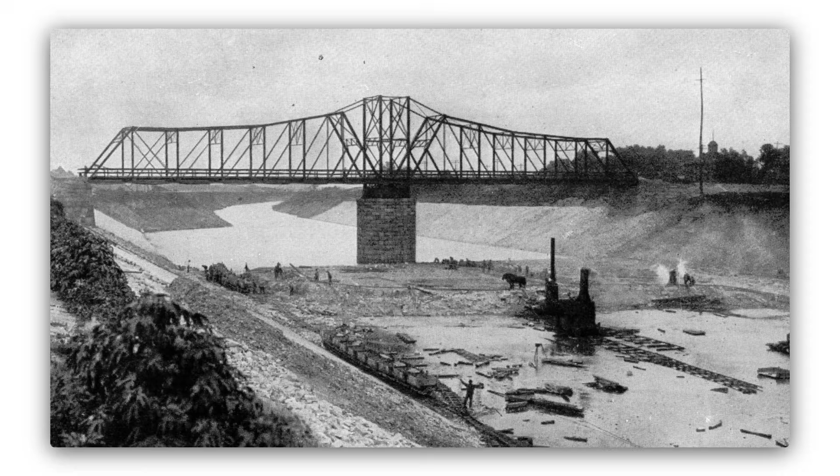American engineers between 1892 and 1900 completed an engineering project that no modern team has ever replicated. They reversed the flow of the Chicago River. The project cut 28 miles through Niagaran limestone bedrock and moved 43 million cubic yards of earth and rock by hand. 8,500 workers built it under Chief Engineer Isham Randolph.

On January 2, 1900, the canal opened. The river reversed direction. The typhoid death rate in Chicago dropped from 174 per 100,000 to 14 per 100,000 within a decade. The river is still flowing backwards today.

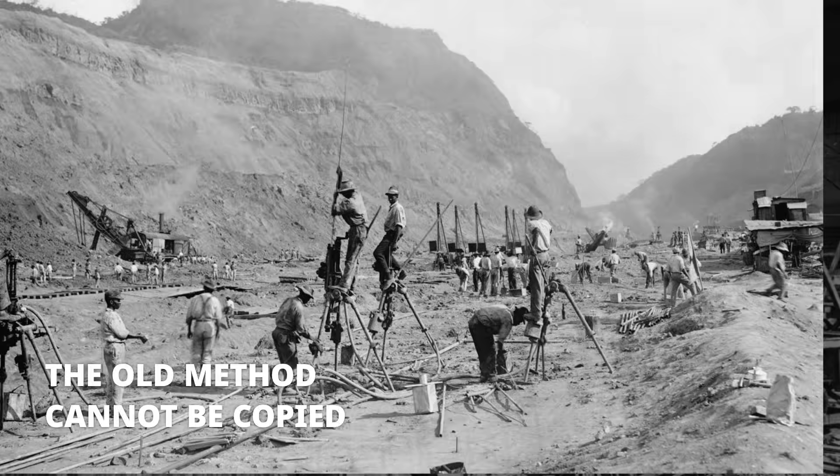The Chicago River reversal is the most extraordinary engineering achievement of the late 19th century in the United States. The project does not have the public fame of the Panama Canal or the Brooklyn Bridge or the Hoover Dam. Few Americans today know that Chicago reversed the flow of its river. Fewer still know how the reversal was accomplished or why it was necessary.

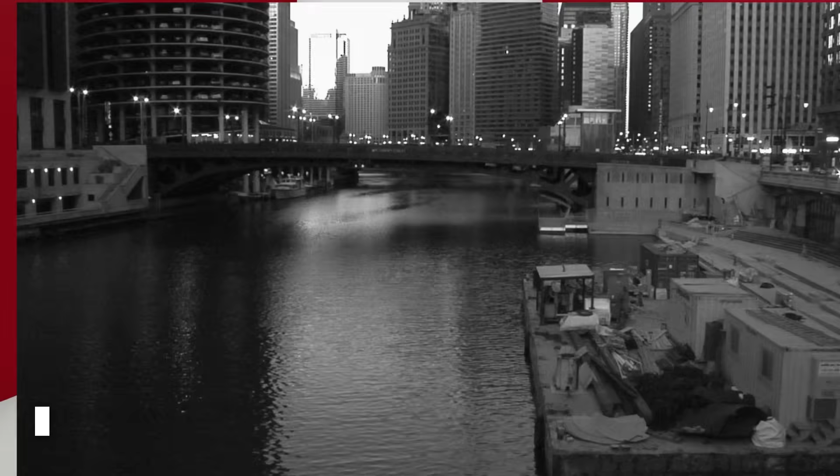The reversal was the engineering precondition for Chicago's emergence as a major American city. Without the reversal, Chicago would have been killed by its own sewage. The river reversal solved the sewage problem by reversing the direction of water flow so that Chicago's wastewater no longer contaminated Lake Michigan, which was the city's drinking water source. The reversal worked. The river has been flowing the wrong direction for 125 years. The problem that necessitated the reversal was sanitation.

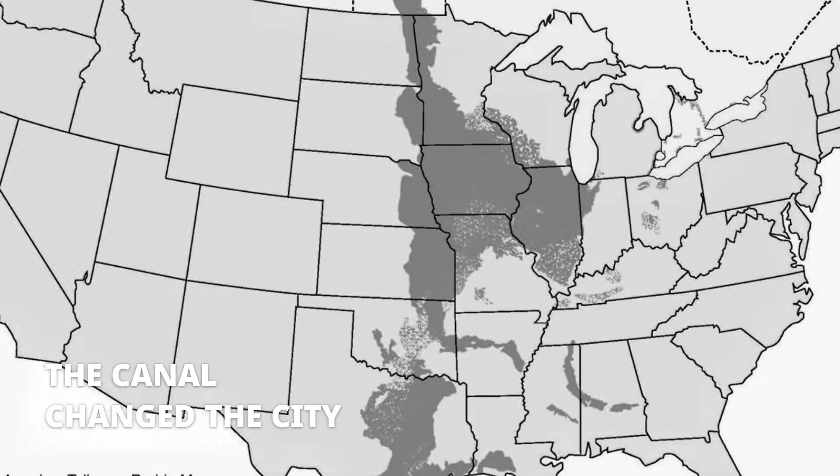Chicago in the 1880s was a rapidly growing industrial city with a population approaching 1 million people. The city sat on the southwest shore of Lake Michigan at the mouth of the Chicago River. The Chicago River flowed naturally from west to east, draining the surrounding flat prairie land into Lake Michigan. Chicago's wastewater entered the Chicago River through the city's expanding sewer system, then flowed into Lake Michigan, which was Chicago's drinking water source. The wastewater contaminated the drinking water.

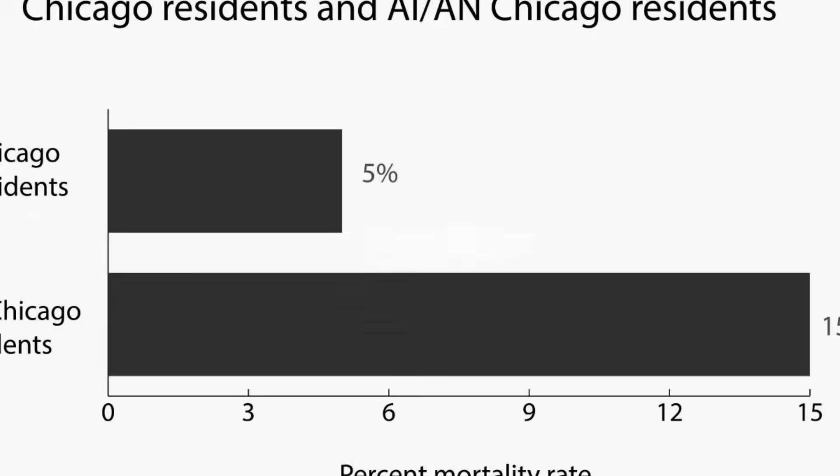Typhoid fever and cholera became endemic in Chicago by the 1880s. The death rate from typhoid fever in Chicago in 1891 reached 174 per 100,000 population, the highest typhoid death rate of any major American city. Chicago was dying of its own sewage.

The engineering solution proposed by sanitary engineer Lyman E. Cooley in the 1880s was to reverse the flow of the Chicago River. If the river could be made to flow westward instead of eastward, the city's wastewater would flow away from Lake Michigan rather than into it. The wastewater would discharge into the Mississippi River drainage system through the Illinois River, eventually reaching the Gulf of Mexico 900 miles downstream. Lake Michigan would be protected from contamination.

Chicago could draw clean drinking water from the lake. The typhoid and cholera death rates would drop. The city could continue to grow.

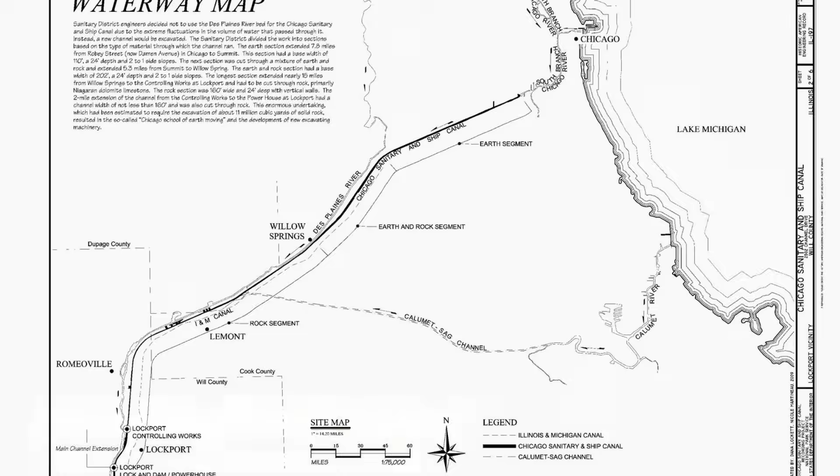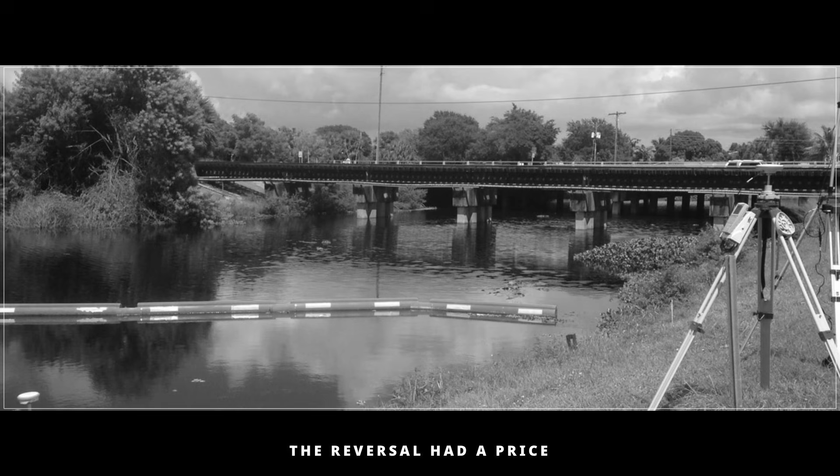Now we walk through what reversing a river actually required at the engineering level. The Chicago River has its watershed almost entirely on the Lake Michigan side of the Chicago Divide, a low ridge of land approximately 3 to 5 miles inland from the lakeshore. To reverse the river, engineers needed to cut through that low ridge with a channel deep enough that water from Lake Michigan would flow naturally westward through the channel into the Illinois River drainage system.

The required channel would be approximately 28 miles long, running from the south branch of the Chicago River near downtown Chicago southwest to the Des Plaines River at Lockport, Illinois. The channel had to be deep enough that the water surface at the Chicago end was lower than the Lake Michigan water level, which would cause water to flow continuously from the lake through the river system and into the channel. The required depth was approximately 36 feet below the original ground surface in the deepest sections: 28 miles, 36 feet deep, through Niagaran limestone bedrock, by hand and explosive.

That was the engineering challenge the Chicago Sanitary District faced in 1892 when construction began. The Chicago Sanitary District was created by the Illinois State Legislature in 1889 specifically to design and build the canal. The district had taxing authority over the city of Chicago and the surrounding suburbs, allowing it to issue bonds and collect property taxes to fund construction.

The total construction budget approved by the district in 1890 was approximately $30 million in 1890 dollars, equivalent to roughly $950 million today. Construction began on September 3, 1892, with Chief Engineer Isham Randolph in charge after the original Chief Engineer Lyman Cooley resigned in 1893 over disagreements with the district board.

The political battles that preceded the canal construction were intense and lasted for nearly 2 decades before construction began.

The basic engineering proposal had been developed by sanitary engineer Lyman E. Cooley in the late 1870s, with detailed cost estimates and route surveys completed by 1881. The proposal required the state of Illinois to authorize a special taxing district with bonding authority to fund the construction. The Illinois state legislature debated the proposal through three legislative sessions before finally authorizing the Chicago Sanitary District in 1889.

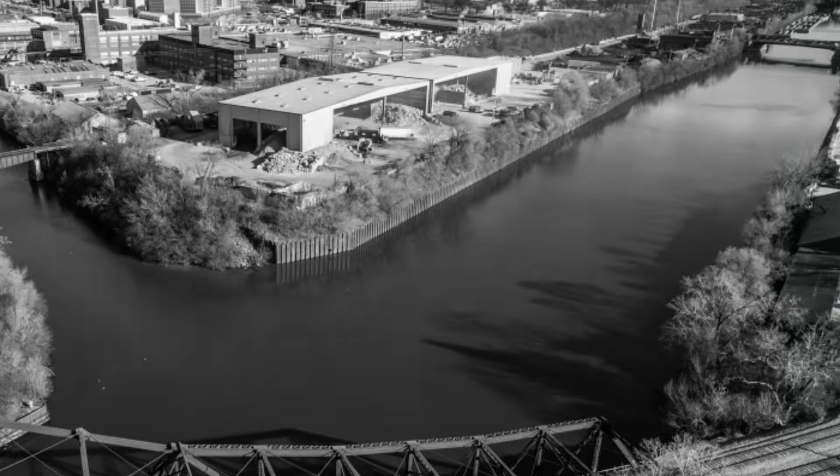The opposition to the canal came from several directions. Suburban property owners along the proposed canal route objected to the disruption of their land. Downstream Illinois River communities objected to receiving Chicago's wastewater. Missouri and other downstream Mississippi River states objected on principle to having Chicago divert its sewage into the broader Mississippi system. Railroad interests opposed the canal because it would create new water-based competition for freight traffic. The Catholic Church in Chicago opposed certain aspects of the route alignment that would have required relocating church properties.

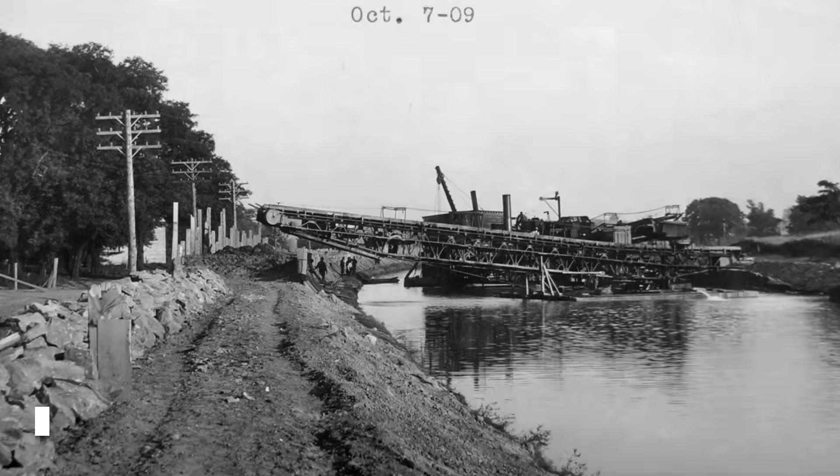The cumulative opposition delayed the project for years. The final authorization came in 1889 after a particularly severe typhoid outbreak in Chicago killed nearly 2,000 people in a single year. The public health emergency overcame the political opposition. The sanitary district was created with broad taxing authority across the Chicago metropolitan area, allowing it to issue bonds backed by property tax revenues. The district board hired Cooley as the original chief engineer. Cooley spent two years refining the route alignment and finalizing the engineering specifications. The construction contract bidding occurred in early 1892, with contracts awarded to a consortium of regional construction firms.

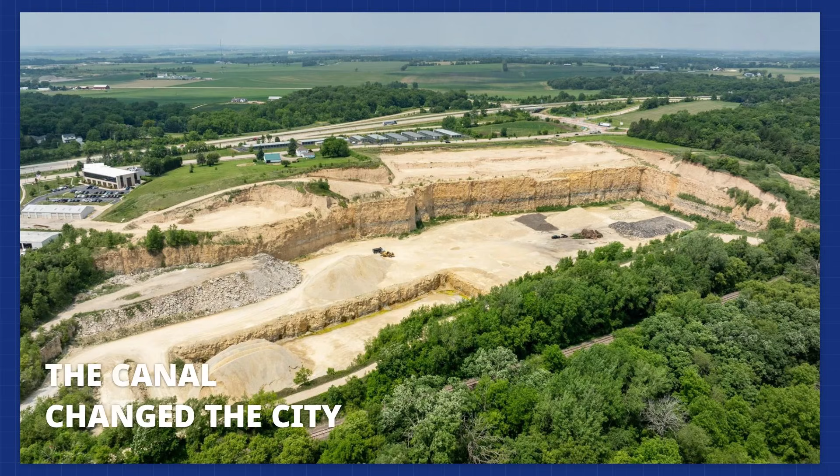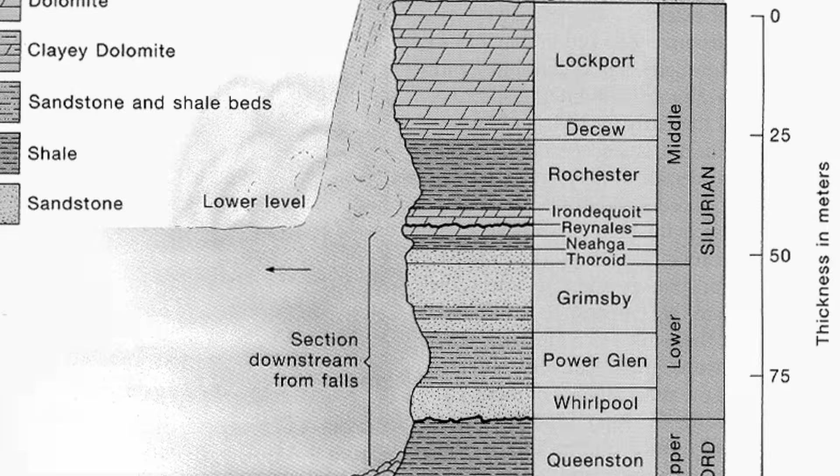The Niagara limestone was the primary excavation challenge. The limestone was hard enough to require dynamite blasting for removal, but soft enough that mechanical excavation could supplement the blasting in some sections. The geology was relatively consistent across the route, which simplified the engineering planning significantly. Unlike mountain tunneling projects where unexpected geological conditions could halt work for months, the Chicago Canal excavation could be planned with high confidence in the geology.

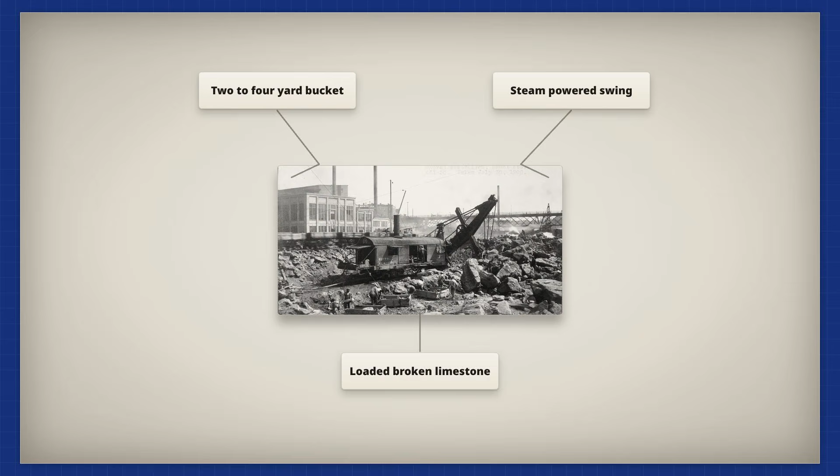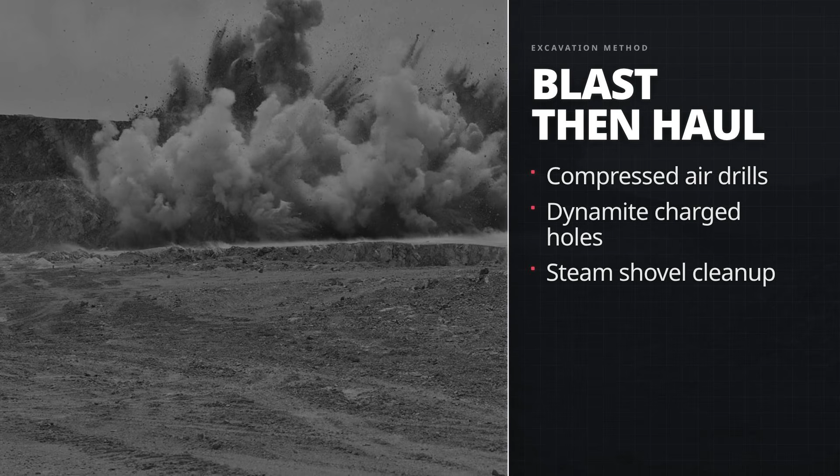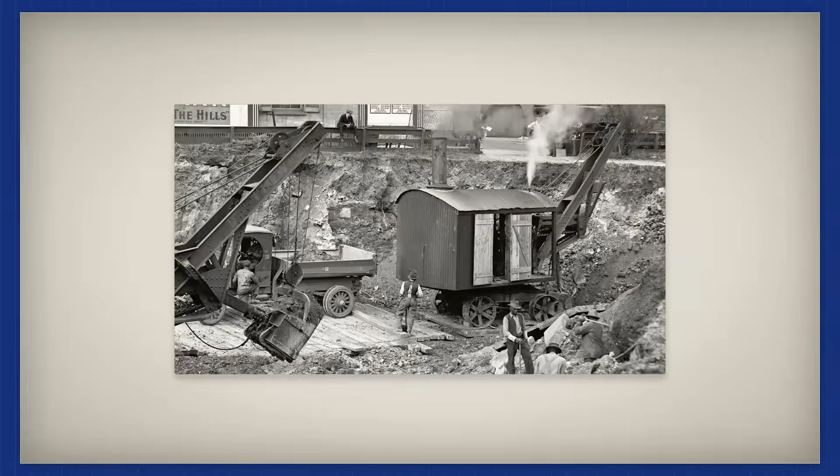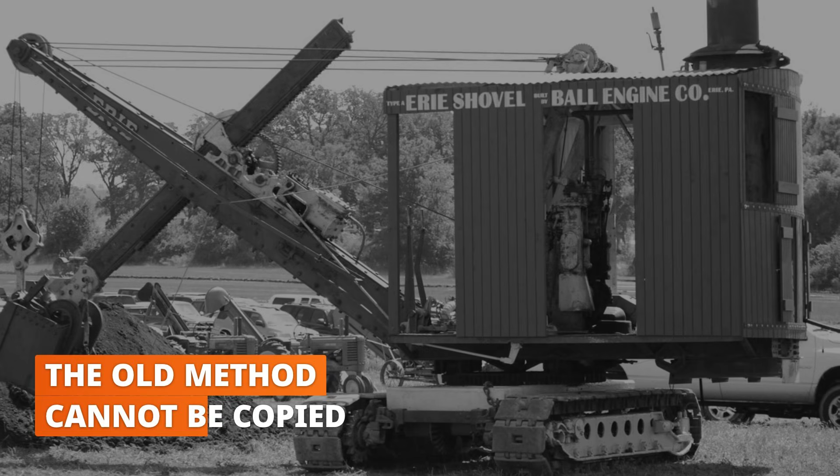The construction work proceeded by hand drilling, blasting, and steam shovel excavation. The crews drilled blast holes into the limestone bedrock using pneumatic drills powered by compressed air piped from portable steam-powered compressors at the work sites. The blast holes were loaded with dynamite, which had become the standard American blasting tool since the 1870s. The blasting broke up the limestone bedrock into rubble that could be removed by hand labor or by steam shovel. The steam shovels of the 1890s were primitive compared to modern construction equipment, with each shovel having a bucket capacity of approximately 2 to 4 cubic yards. The cumulative excavation rate was approximately 10 to 20,000 cubic yards of bedrock removed per day at peak operations, with the entire workforce of 8,500 workers operating across the full 28-mile length of the canal simultaneously.

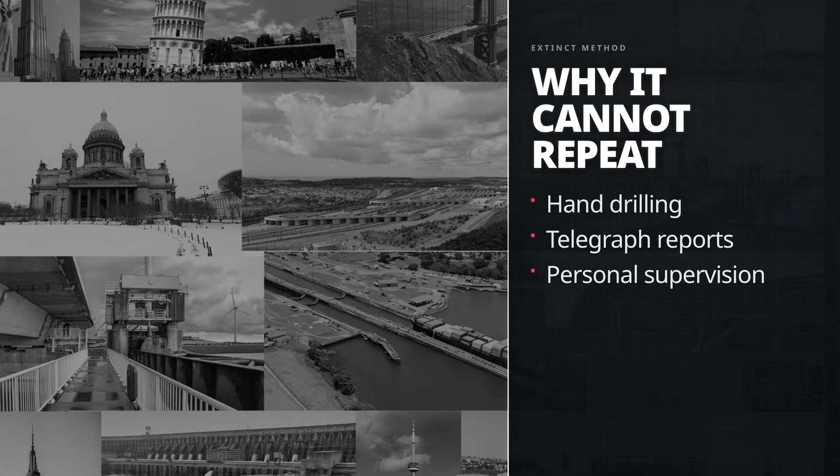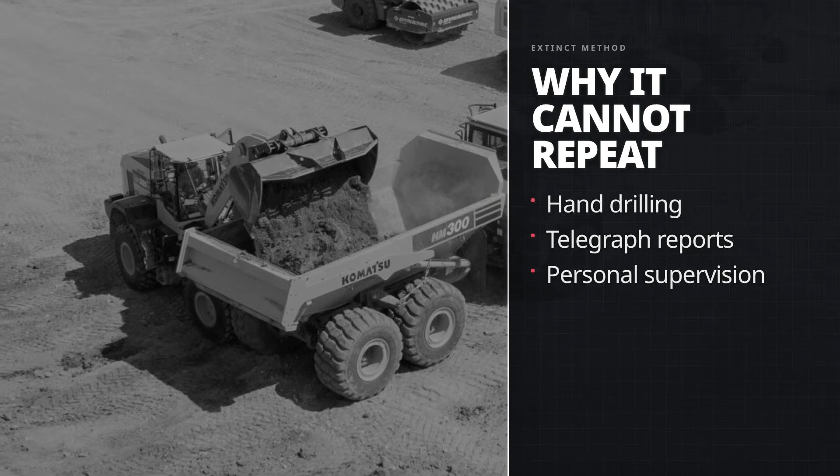Now we walk through why no modern engineering team has replicated the Chicago Canal construction methods. The frame for this video is deliberately provocative. The title says AI engineers cannot recreate the project. The provocation has a specific technical meaning. Modern engineering projects of comparable earth-moving scope, including the Panama Canal expansion completed in 2016 and the Three Gorges Dam in China completed in 2012, use machinery and methods that did not exist in 1892.

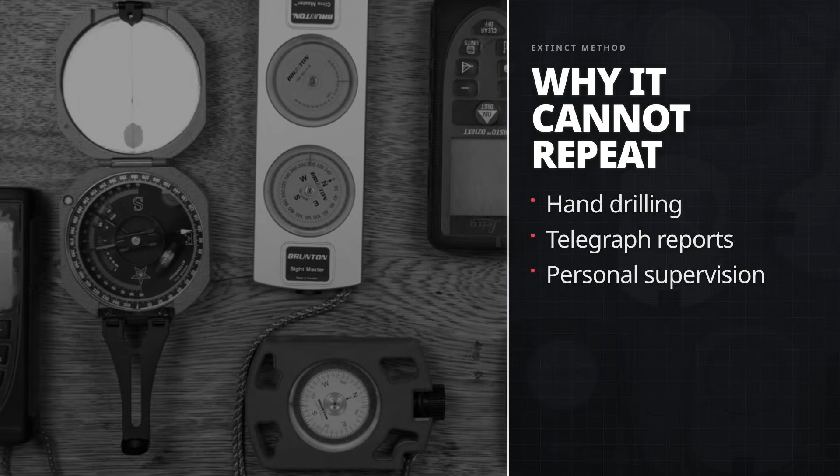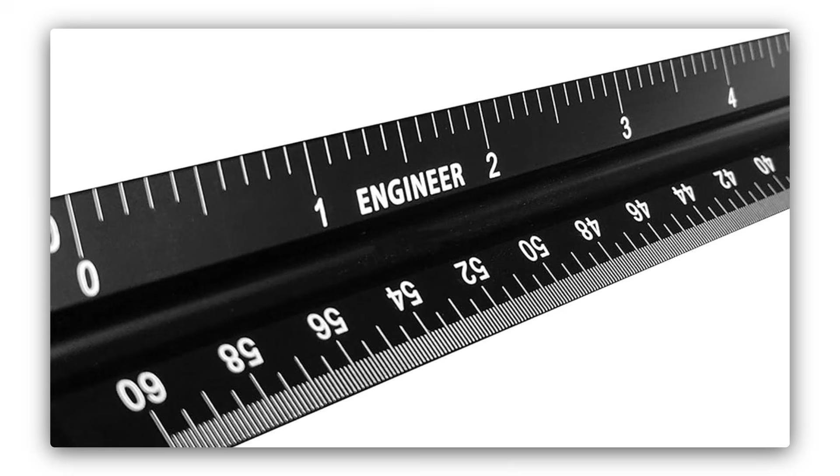Modern projects use enormous bucket wheel excavators, modern explosive technologies, computerized survey instruments, and integrated project management software. The modern methods are vastly more efficient than the 1890s methods on a per-worker basis. Modern projects move more earth per worker per day by a factor of 50 to 100 times the 1890s rate. But the frame is not about whether modern engineering can do larger projects faster. The frame is about whether modern engineering can reproduce the specific coordination pattern of the 1890s construction.

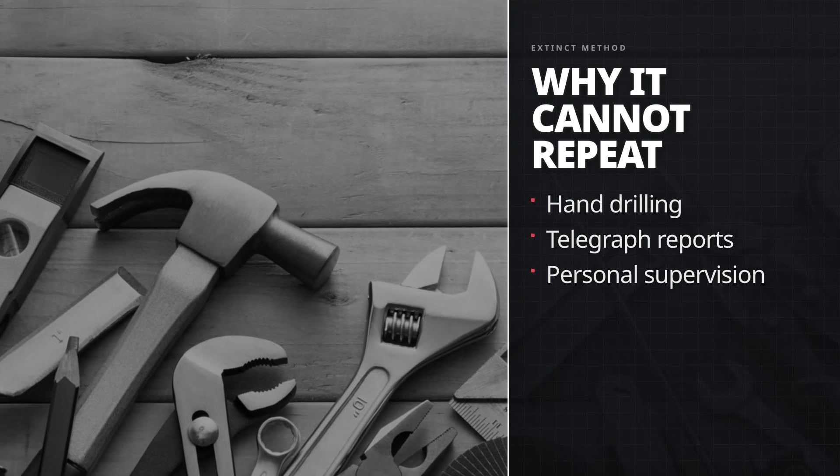8,500 workers labored simultaneously across 28 miles of construction, using hand tools and primitive machinery, with work coordinated through handwritten daily reports, telegraph communications, and personal supervision by Isham Randolph and his lieutenants. This coordination pattern required intensive labor management at a scale that modern engineering simply does not use anymore. Modern projects use much smaller workforces, working more intensively with more powerful machinery. The 1890s coordination pattern is essentially extinct as a working approach.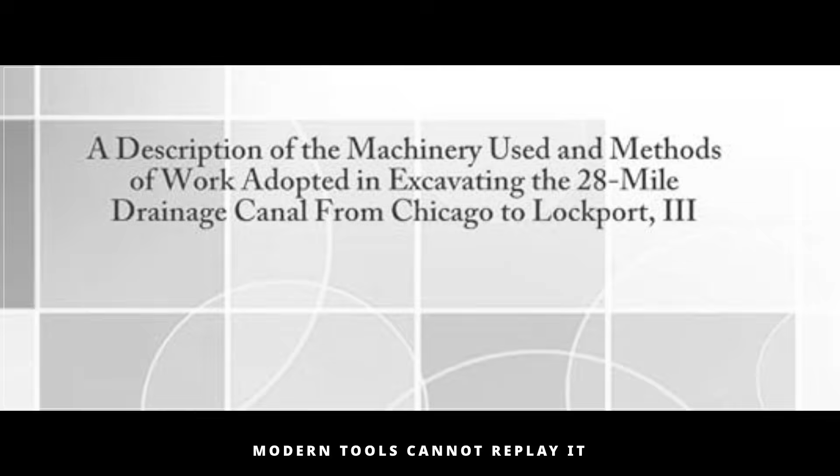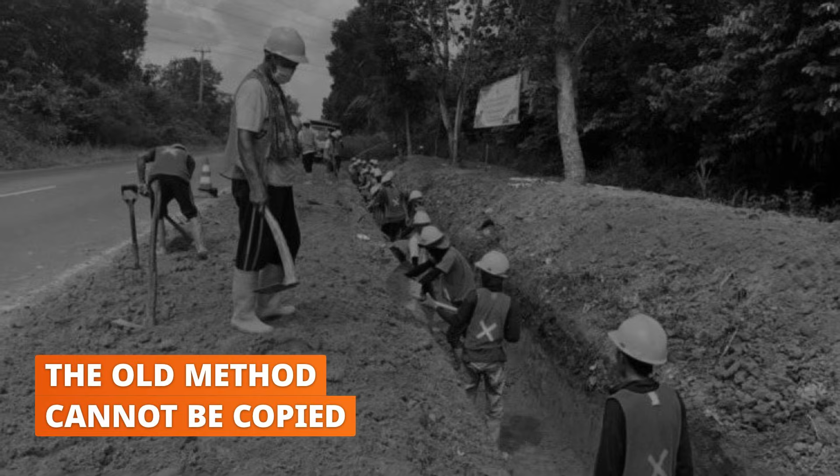Modern engineering teams have never attempted to replicate the Chicago Canal construction with the same coordination methods, the same hand labor scale, and the same constraint set. The provocation is defensible because it is technically true: nobody has tried to build a similar project using similar methods. The closest modern equivalent would be massive infrastructure projects in developing countries where labor is cheap and machinery is expensive, but even those projects use modern construction equipment and modern project management methods that the 1890s Chicago Canal did not have.

The Chicago Sanitary and Ship Canal opened on January 2, 1900. The opening was carefully timed. The Chicago River had been showing signs of contaminating Lake Michigan more severely than usual in late 1899, and the district board accelerated the opening by approximately 4 months to address an emerging typhoid crisis.

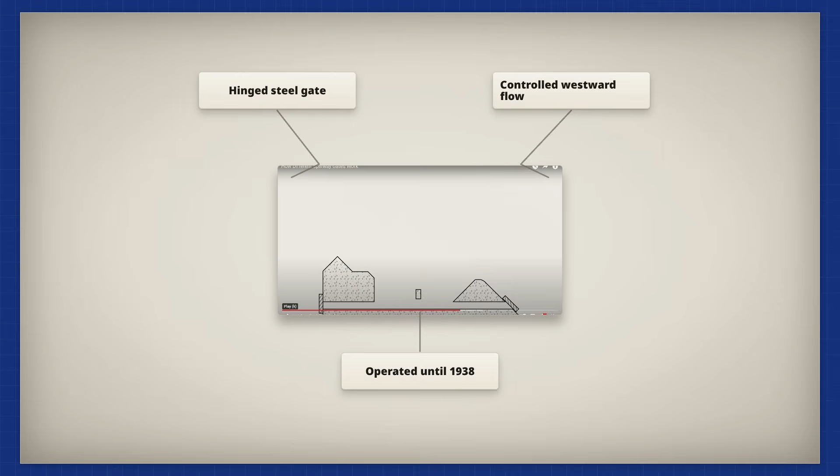The actual opening ceremony was a small affair. A construction crew opened the Bear Trap Dam, the hinged steel gate at the Chicago end of the canal, allowing water from the Chicago River to flow into the canal and westward toward the Des Plaines River. Within hours of the dam opening, the Chicago River had reversed direction. Water flowed from Lake Michigan into the river, then westward through the canal into the Des Plaines, then into the Illinois River, and ultimately to the Mississippi.

The state of Missouri immediately sued the state of Illinois in federal court, alleging that the Chicago Canal would contaminate the Missouri water supply downstream. The lawsuit reached the United States Supreme Court in 1906. The court ruled in favor of Illinois, holding that the dilution effect of the Illinois and Mississippi River flows would adequately reduce the Chicago wastewater contamination by the time the water reached Missouri.

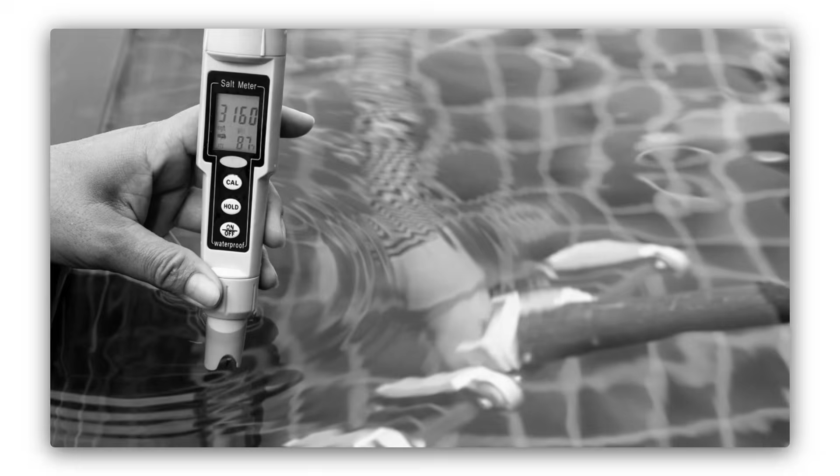The ruling was technically correct. Modern water quality monitoring confirms that the Chicago wastewater is diluted to acceptable levels by the time it reaches the Missouri portion of the Mississippi River, hundreds of miles downstream.

The typhoid fever death rate in Chicago dropped dramatically after the canal opened. In 1901, the first full year of operation, the typhoid death rate dropped from the 1891 peak of 174 per 100,000 to approximately 90 per 100,000. By 1910, the rate had dropped to approximately 30 per 100,000. By 1920, it had dropped to 14 per 100,000, a reduction of more than 90% from the pre-canal peak. The Chicago Canal had effectively solved the sanitation crisis that had been killing Chicagoans at a rate of approximately 1,500 typhoid deaths per year through the 1890s. The canal saved thousands of lives per year through the early 20th century.

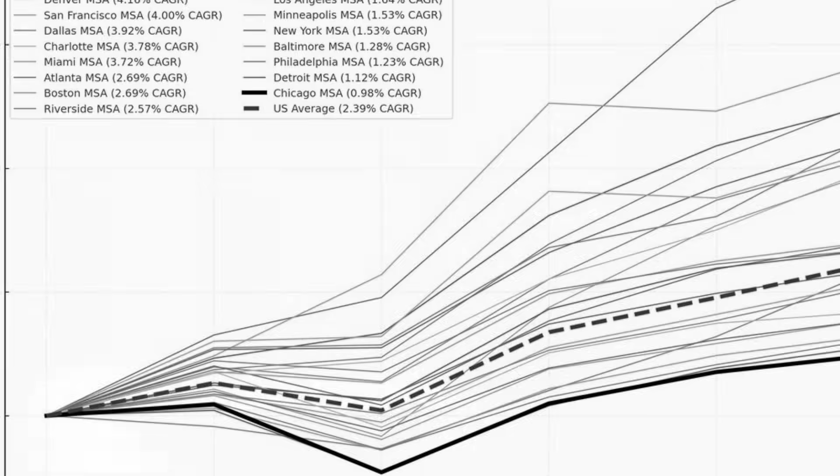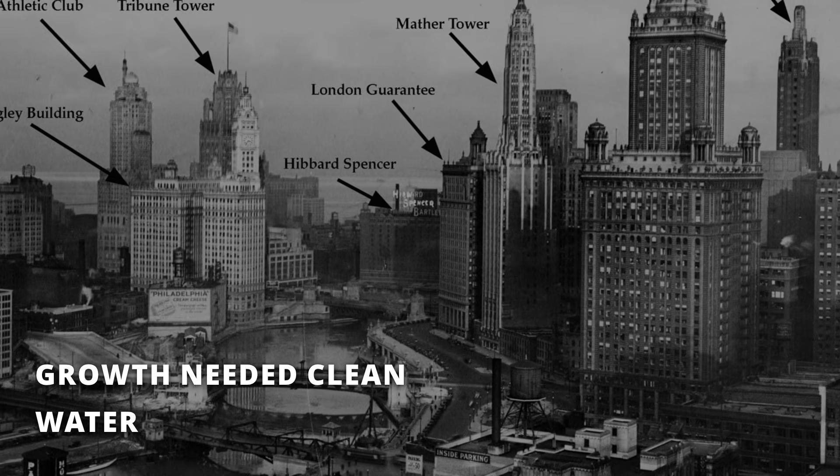The economic effect on Chicago was also dramatic. The canal allowed Chicago to continue growing as a major industrial city, reaching a population of approximately 2.5 million people by 1920. The Port of Chicago became a major freight handling facility, with the canal carrying both commercial freight and the city's wastewater. The combined infrastructure made Chicago the second largest city in the United States by 1920, surpassed only by New York City. Without the canal, Chicago's growth would have been capped by the sanitation crisis, and the city probably would have remained a regional rather than national economic center.

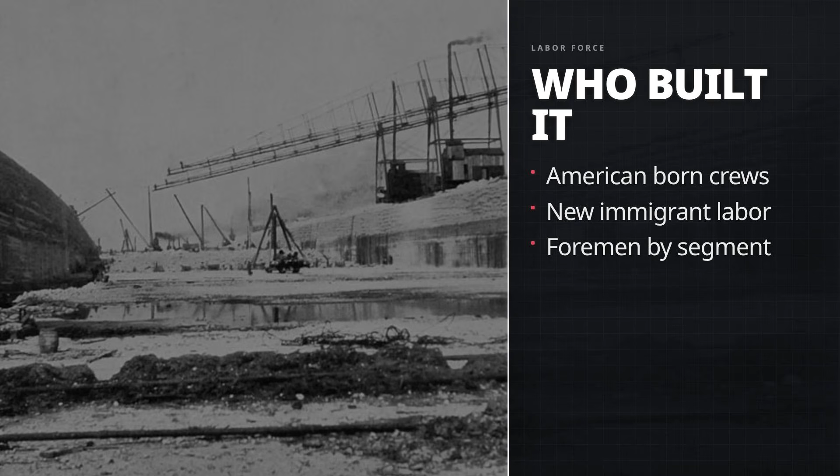The labor force on the canal construction reflected the broader American industrial labor pool of the 1890s. Approximately 40% of the workers were American-born, primarily from Illinois, Indiana, and the surrounding Midwest. Approximately 30% were European immigrants from the recent immigration wave, including Italians, Poles, Czechs, Hungarians, and Slovaks. Approximately 15% were Irish-American workers from the established Irish immigrant communities of Chicago. Approximately 10% were German-American workers. The remaining 5% were a mix of Scandinavian, Russian, and other European immigrant groups.

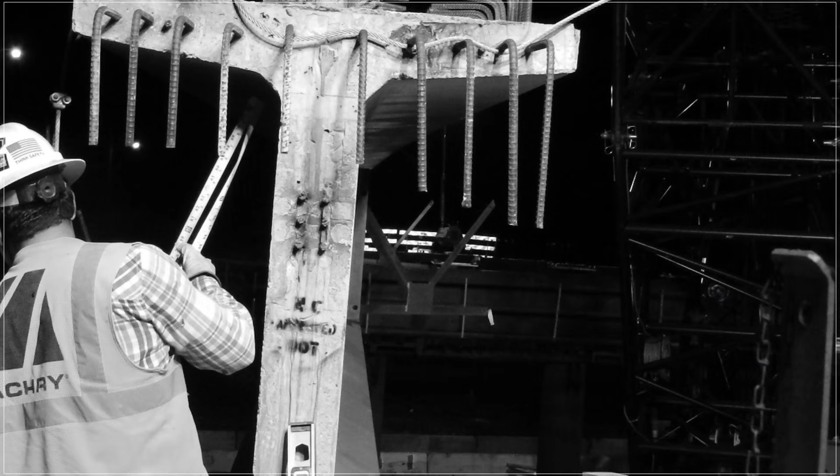The labor force was organized into crews of approximately 100 to 200 workers per construction segment, with each crew under a foreman who reported to the section superintendent. Total cumulative employment over the 8-year construction period was approximately 25,000 individual workers, with peak simultaneous employment of 8,500 workers during the middle years of construction.

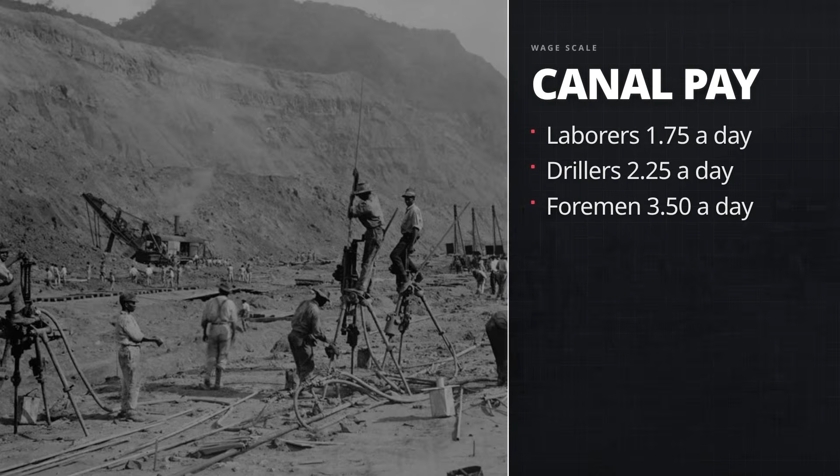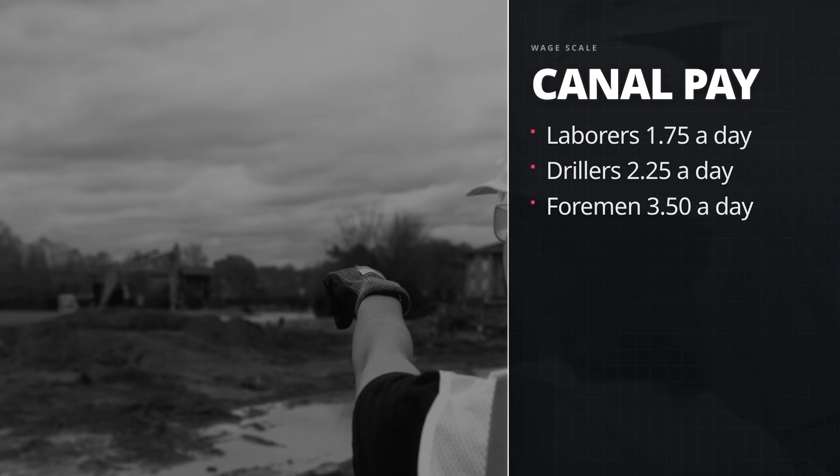The wages paid on the canal were competitive with the broader Chicago industrial labor market of the 1890s. General laborers earned approximately $1.75 per day. Skilled drill operators earned approximately $2.25 per day. Steam shovel operators earned approximately $3 per day. Crew foremen earned approximately $3.50 per day. Section superintendents earned approximately $5 per day. Workers worked 10-hour shifts, 6 days per week, with Sundays off.

The work was physically demanding, but the conditions were better than the typical Chicago meatpacking or steel mill work of the era. The canal construction had a labor turnover rate of approximately 40% per year, lower than the industrial average of the period, reflecting the relatively favorable working conditions.

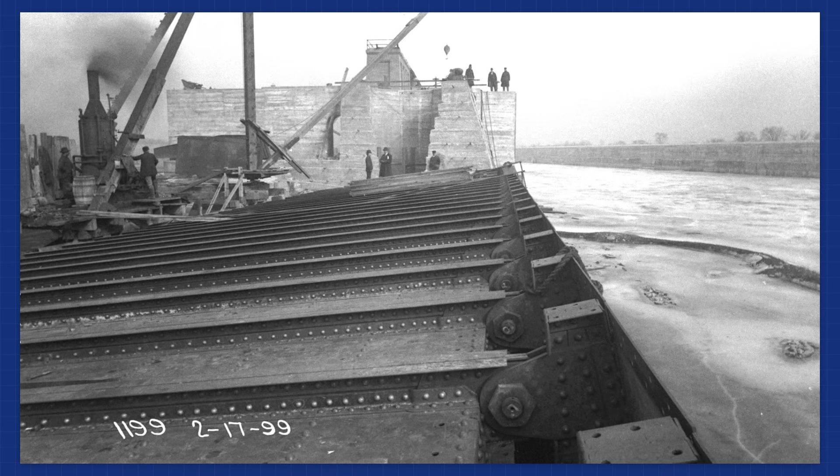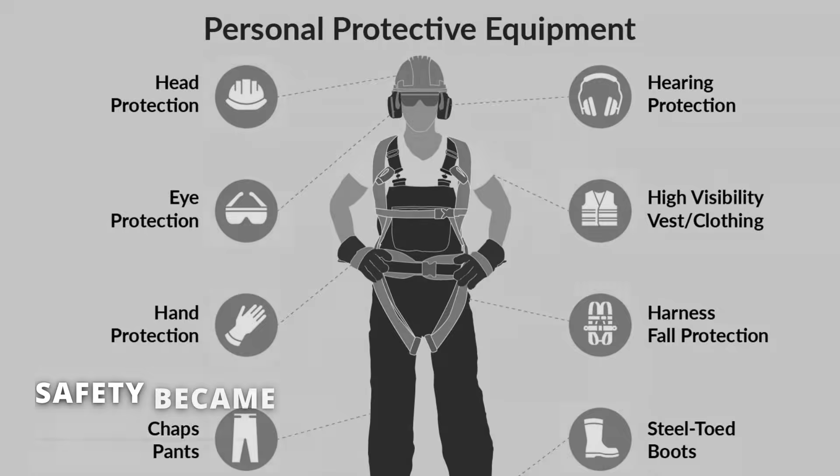The worker fatality count for the canal construction was relatively low considering the scale of the project. Approximately 70 workers died across the 8 years of construction, primarily from blasting accidents, steam shovel accidents, drowning in flooded work pits, and various crushing injuries from rock falls and equipment failures. The fatality rate of about 9 deaths per year was substantially lower than the typical American construction project of the era, which often saw fatality rates of 50 to 100 deaths per year on comparable scale projects.

The lower fatality rate reflected the application of relatively modern safety practices developed by the late 19th century American mining and construction industries. The canal was the first major American infrastructure project to systematically use steel-toed boots for the labor force, electric lighting in covered work areas, and continuous safety inspection by professional safety officers.

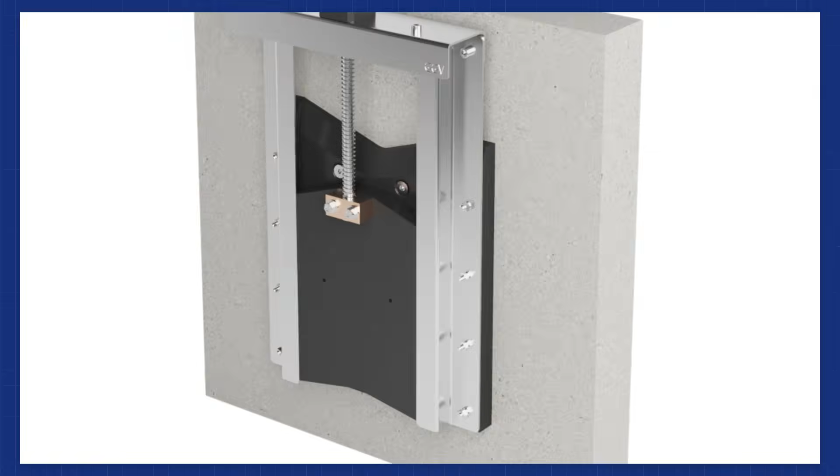The Bear Trap Dam at the Chicago end of the canal was a particularly notable engineering feature. The dam was a hinged 60-foot wide steel gate that could be lowered to allow water flow or raised to block flow. The gate was designed by structural engineer Major John Lyle Harrington of the United States Army Corps of Engineers, and was the largest such hinged dam structure in the United States at the time of construction.

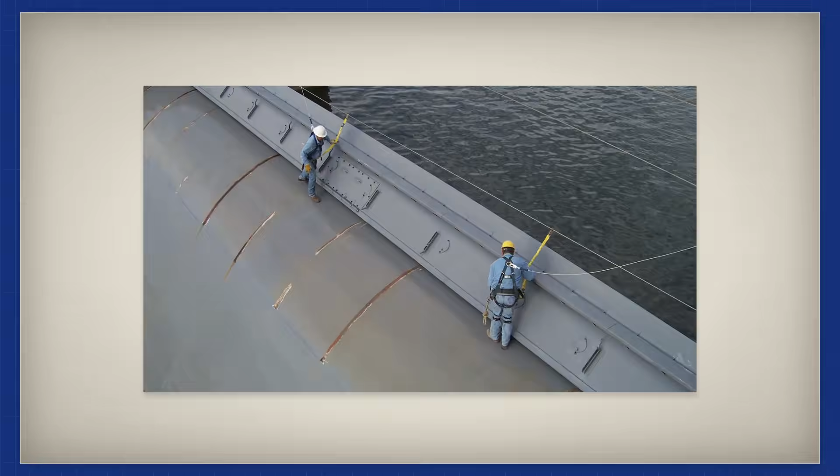The Bear Trap Dam operated continuously from 1900 until 1938, when it was replaced with a more modern control structure. The original Bear Trap Dam structural members are preserved at the Chicago History Museum.

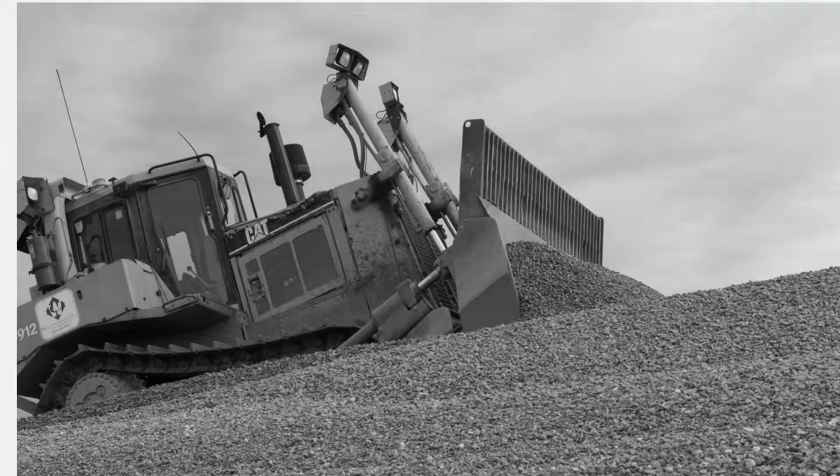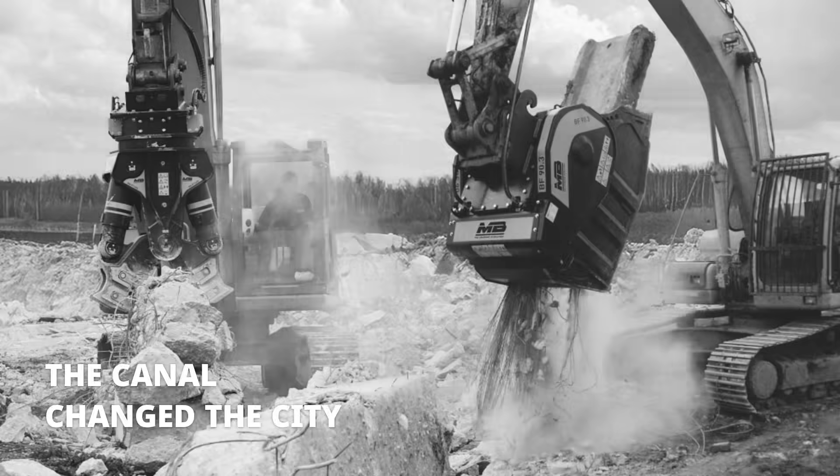The technical lessons that the Chicago Canal contributed to subsequent American engineering practice were substantial. The canal demonstrated that large-scale earth-moving projects could be completed on schedule and within budget when supported by appropriate political will and adequate financing. The canal demonstrated that hand labor methods could be effectively combined with mechanical excavation equipment to produce results that exceeded what either approach could have produced independently.

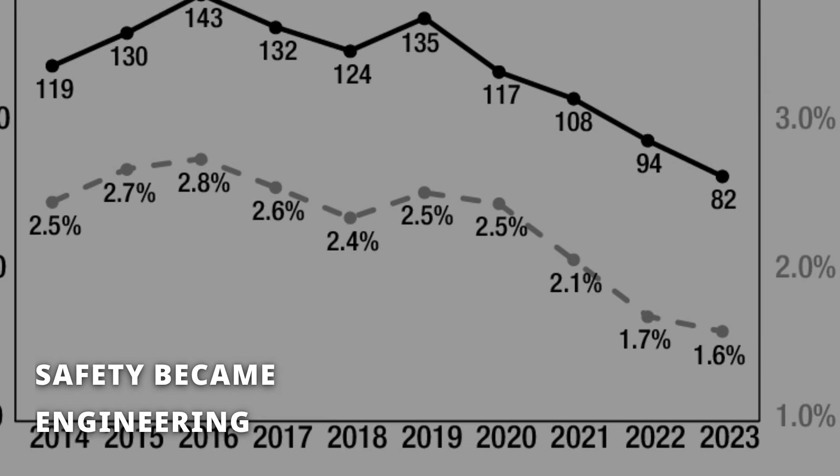The canal demonstrated that systematic safety practices could substantially reduce worker fatality rates compared to the typical American construction project of the era. The canal demonstrated that public health benefits from sanitation infrastructure could be quantified through systematic mortality statistics. The canal demonstrated that interstate water rights disputes could be resolved through federal court proceedings rather than through political negotiation alone.

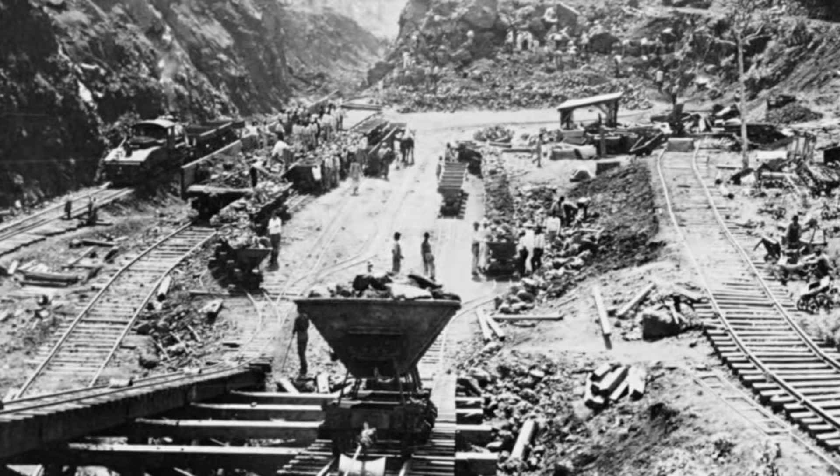The Panama Canal American-era construction between 1904 and 1914 drew extensively on the Chicago Canal precedent. The Panama Project engineers studied the Chicago construction methods, the labor management approaches, the safety protocols, and the political financial structures developed for the Chicago project. Several Chicago Canal engineers transferred directly to the Panama Project after the Chicago Canal opened, including engineering supervisor George Goethals's deputies who had worked on the Chicago Sanitary District construction.

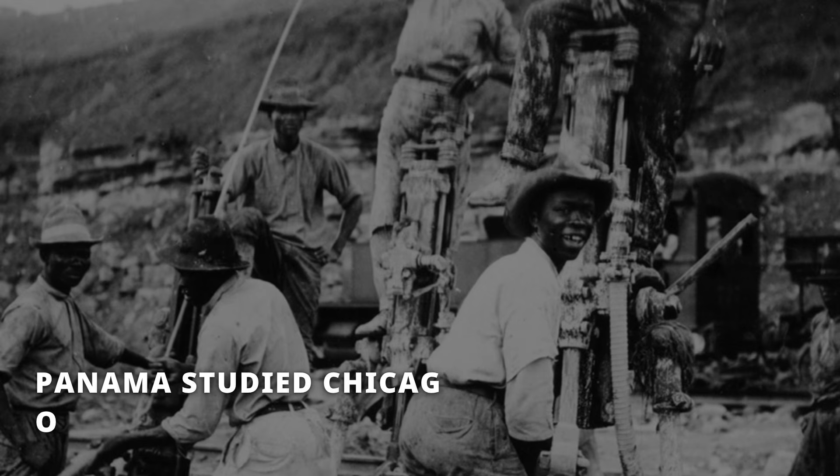The Panama Canal construction labor force was substantially larger than the Chicago Canal at approximately 75,000 workers at peak, but the management methods and the construction techniques traced directly back to the Chicago precedent.

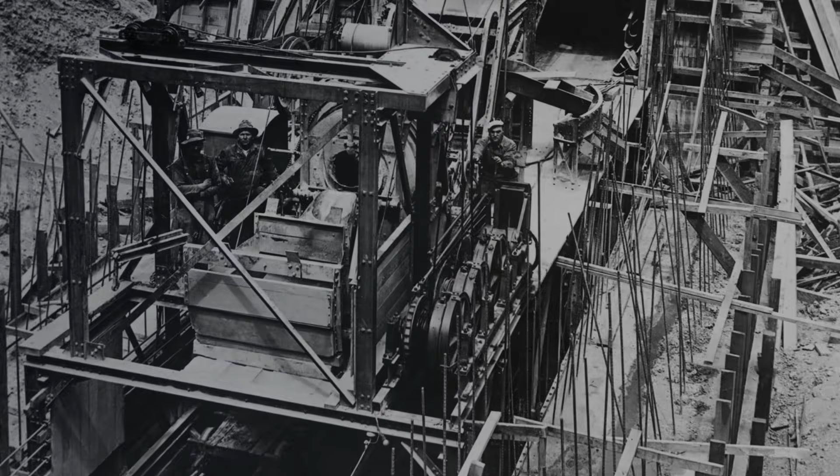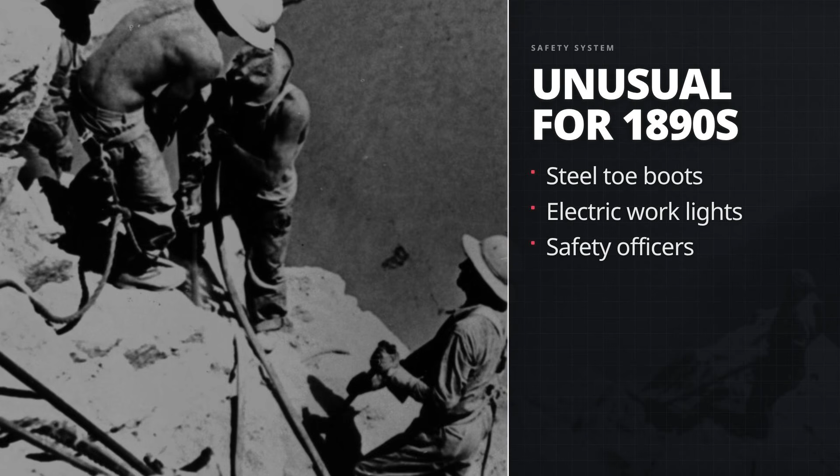The Hoover Dam construction in the 1930s also drew on the Chicago Canal precedent, though less directly than the Panama Canal. The Hoover Dam labor management approach included the systematic safety practices that had been pioneered at Chicago, the worker compensation insurance system that had been refined through the Chicago experience, and the contractor coordination methods that the Chicago Sanitary District had developed.

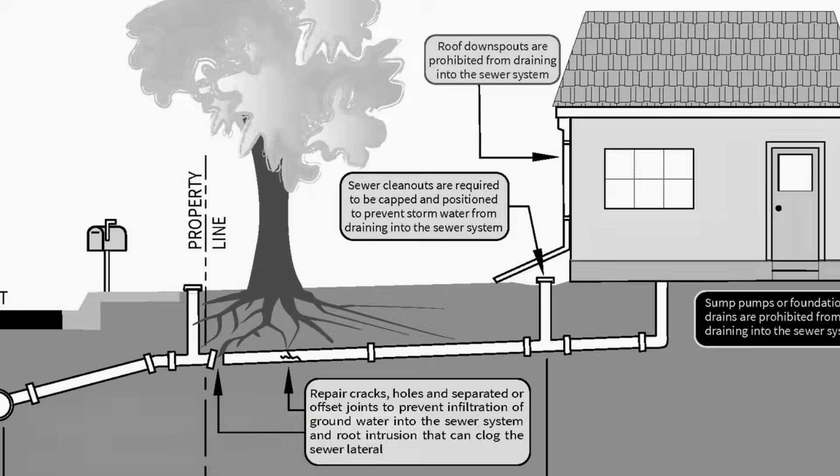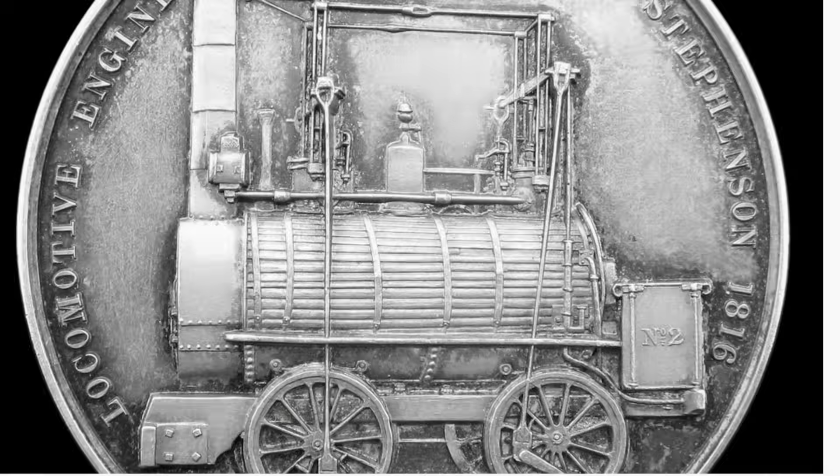Isham Randolph served as chief engineer of the Chicago Sanitary District from 1893 until 1907, completing the original canal and overseeing the first 7 years of operation. Randolph was born in Virginia in 1848 and trained as a civil engineer through self-study and field experience, rather than through formal university education.

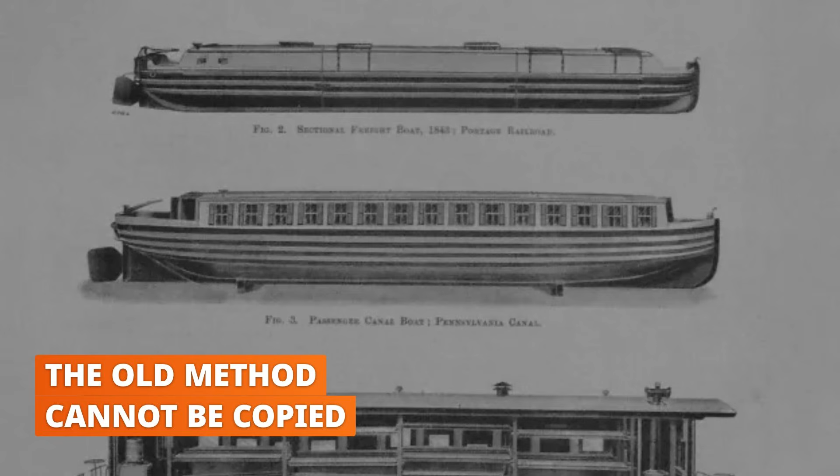Before joining the Chicago Sanitary District, Randolph had worked on various railroad and canal projects in the South and Midwest. After completing the Chicago Canal, Randolph consulted on various other major American water projects, including the Panama Canal American-era construction. He died in 1920 at the age of 72.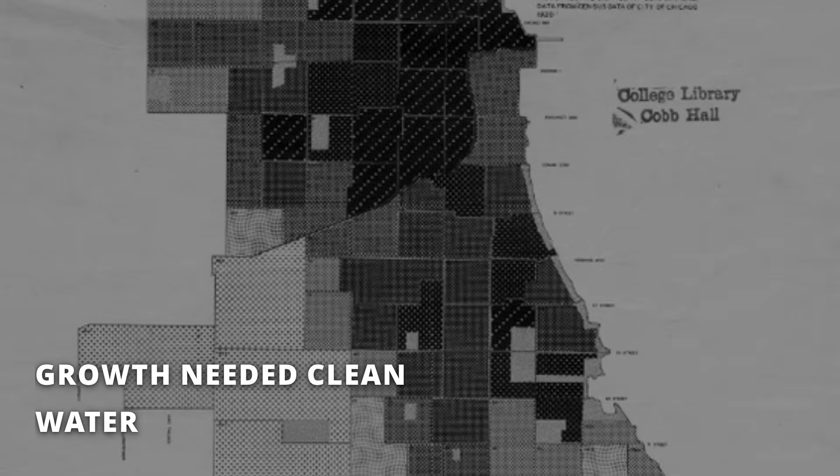The economic effect of the canal on Chicago's emergence as a major American city deserves more detailed treatment. The city of Chicago in 1890, before the canal was operational, had a population of approximately 1 million and a metropolitan economy dominated by meatpacking, grain trading, and railroad freight handling.

The typhoid mortality crisis that the canal addressed was directly limiting Chicago's continued growth. Cities with high typhoid death rates struggle to attract continued immigration and investment because workers and capital prefer cities with lower disease risk.

Without the canal, Chicago in 1900 would probably have stabilized at approximately 1.25 million population and would have been increasingly losing population to other Midwest cities, including St. Louis, Cincinnati, and Cleveland. The canal removed the disease constraint on Chicago's growth.

After the canal opened in 1900, Chicago grew rapidly. The population reached 1.5 million by 1905, 1.75 million by 1910, and over 2.25 million by 1920. The metropolitan economy diversified beyond meatpacking and grain trading into manufacturing, finance, and corporate headquarters functions.

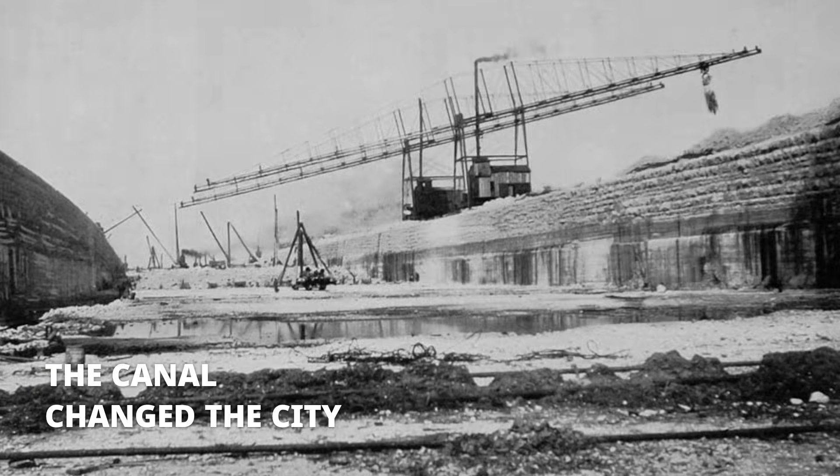Chicago became the second largest city in the United States by 1920, surpassed only by New York City. The Chicago commercial elite of the 1910s and 1920s explicitly credited the Sanitary District Canal for enabling the continued growth. The Chicago Daily Tribune editorial of January 2, 1910, marking the 10th anniversary of the canal opening, stated that without the drainage canal, Chicago would have stagnated at a population of 1 million people and would never have become the great metropolis of the Midwest.

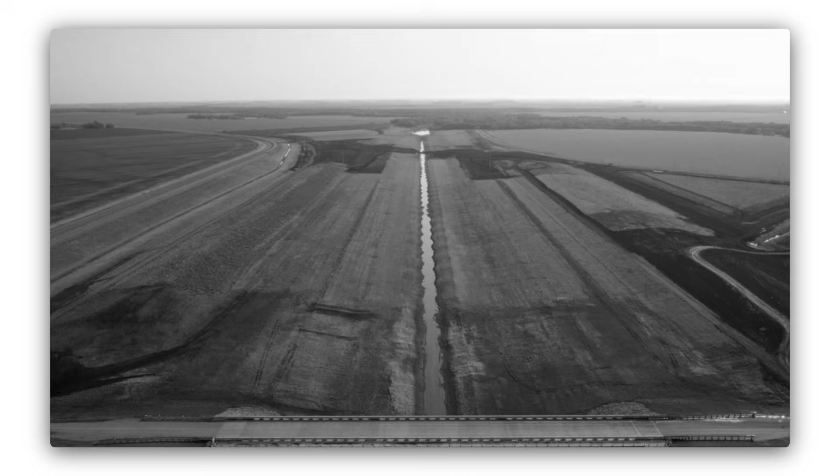The sanitary district engineers and workers of the 1890s saved Chicago as effectively as any military force ever saved a city under siege. The federal court rulings on the canal's interstate water diversion deserve additional discussion because they established American legal precedents that continue to shape federal water rights law today.

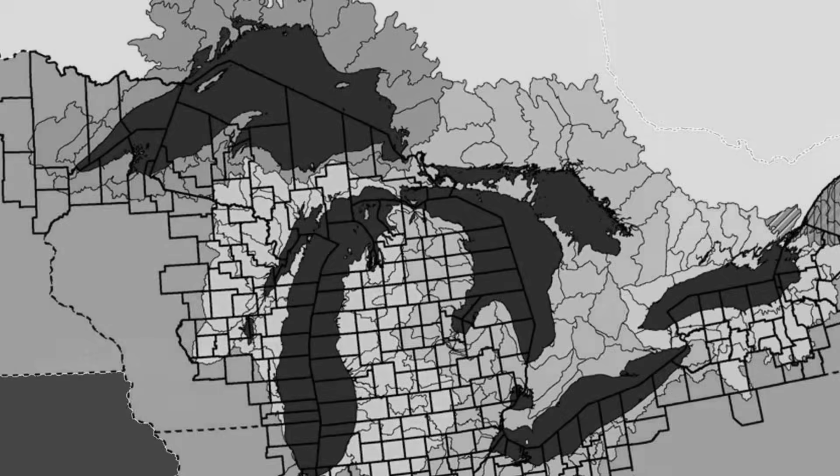The Wisconsin versus Illinois case, decided by the Supreme Court in 1929, held that the state of Illinois could divert Lake Michigan water through the canal only up to a specified maximum flow rate determined by federal regulation. The decision was based on the principle that Lake Michigan was an interstate water resource shared by multiple states and the federal Great Lakes governance system, and that no single state could unilaterally divert lake water in unlimited quantities.

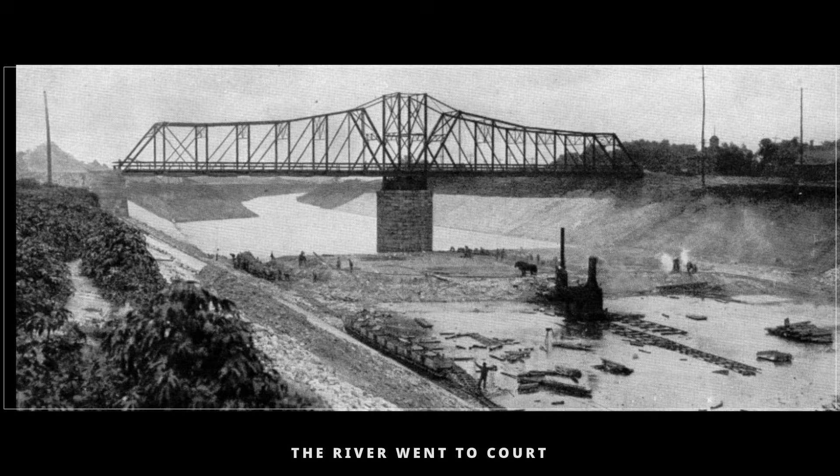The maximum diversion rate established by the Supreme Court has been periodically renegotiated through subsequent court proceedings and federal regulations. But the basic principle that the federal government regulates the Chicago Canal water diversion has been continuous since the 1929 ruling. The Chicago Sanitary and Ship Canal has been continuously in operation since January 2, 1900.

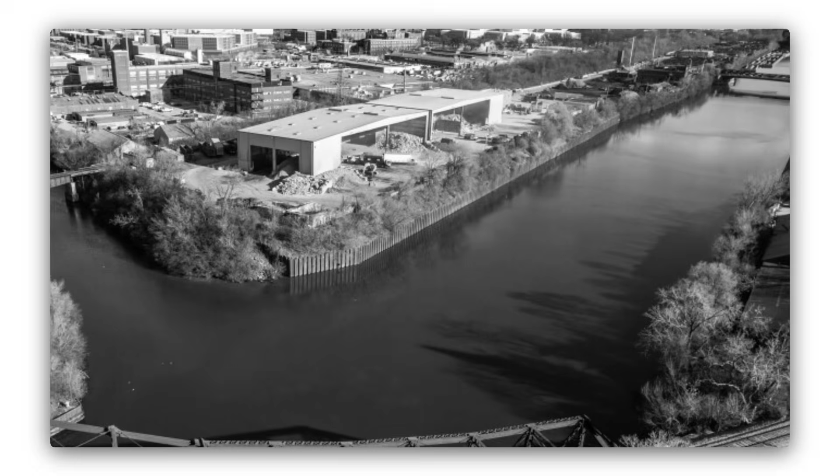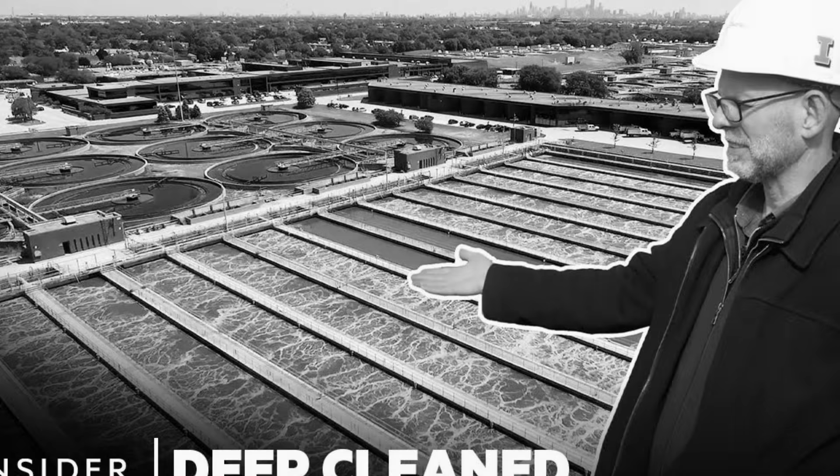The basic infrastructure built between 1892 and 1900 remains in place, with various modernization upgrades to the locks, the pumping stations, and the control systems over the subsequent 12 decades. The canal carries approximately 50,000 commercial vessel transits per year, plus the wastewater treatment outflow from the Chicago metropolitan area's wastewater treatment plants. The total daily flow through the canal is approximately 3 billion gallons.

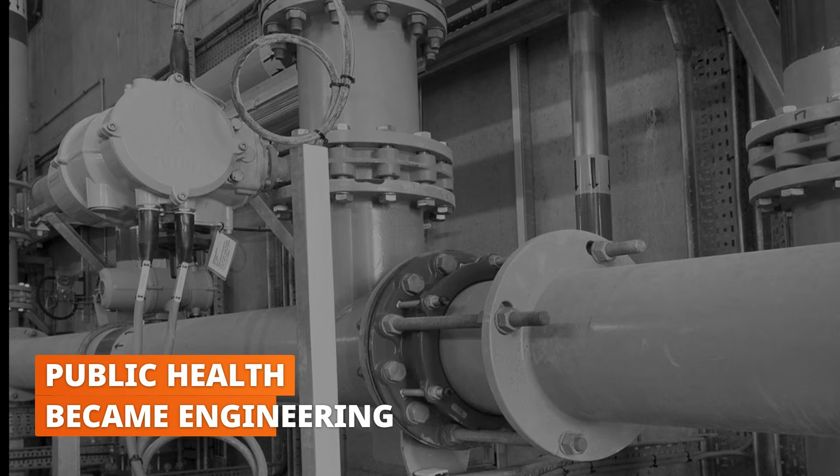The Chicago Canal is not just engineering. It is a particular conjunction of engineering ambition, public health necessity, political will, and labor capability that occurred in the 1890s, and that has not occurred again at the same scale in the United States since.

Modern American infrastructure projects of comparable scope are rare. Modern American infrastructure projects that combine the engineering, the public health, the political, and the labor dimensions in the same configuration as the Chicago Canal are essentially non-existent. The Chicago Canal was a unique moment in American engineering history. It produced a unique piece of infrastructure that has continued to function for a century and a quarter.

The Chicago River is still flowing backwards today, 125 years after Isham Randolph and his 8,500 workers reversed it. The American Society of Civil Engineers designates the canal as a historic civil engineering landmark.

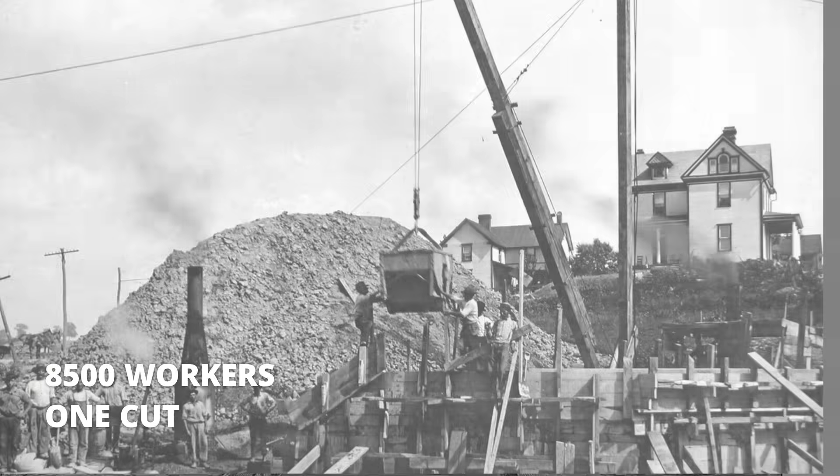No modern engineering team has ever attempted to replicate the 1890s construction methods at the same scale. Modern earth-moving projects use machinery that did not exist in 1892. The coordination of 8,500 hand laborers across a 28-mile cut through limestone bedrock has no 21st century analog.

The Chicago Canal was the engineering precedent that informed the Panama Canal hand-era construction 5 years later. The Panama Canal hand-era engineers studied the Chicago Canal construction methods extensively before beginning their own work in 1904. The Chicago methods became the standard reference for large-scale American hand-labor earth-moving projects for the next 20 years.

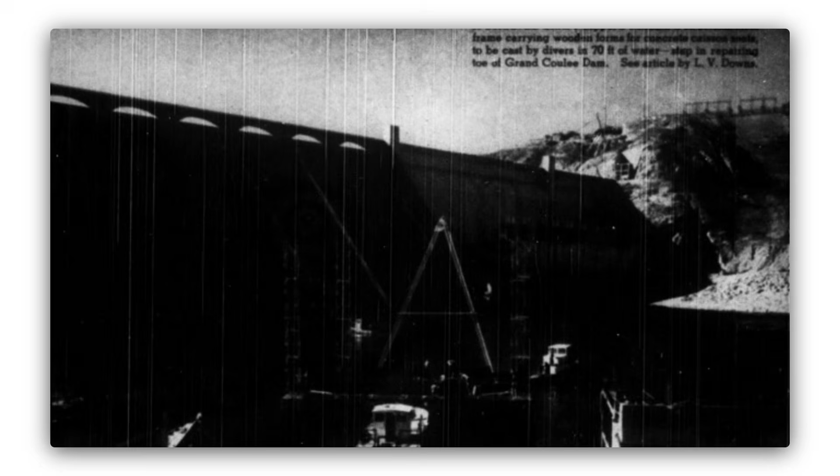Modern engineers do not use those methods anymore. The Chicago Canal stands as the high watermark of pre-mechanized American civil engineering. The records prove it. The river continues to flow the wrong direction. The infrastructure remains.